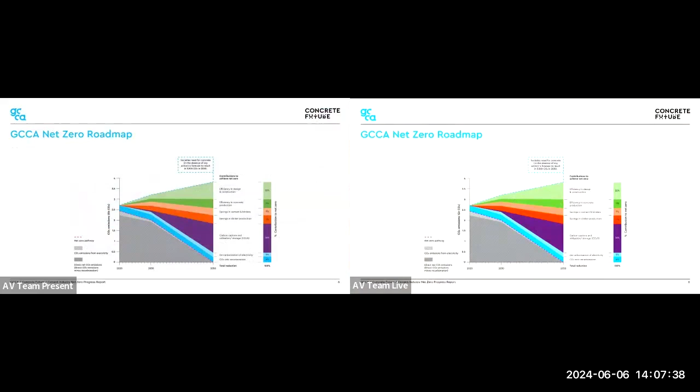So why do we do that? How did this all happen? It's basically this net zero roadmap. We have this collective commitment to go net zero by 2050, and we have identified 7 levers to advance and progress on the net zero journey. Innovation is there to accompany and work on these 7 levers and say, okay, how can innovation help us work, accelerate, progress, develop the discussion, and facilitate development on the journey. That's basically what we are doing here.

Innovation will help us. What we like to say is that our roadmap is feasible with the technologies of today. In principle, we can achieve it today with what we have, but innovation will help us to accelerate, facilitate, and probably make the transition less expensive. That's what we aim to have with innovation.

So how do we work with innovation? We have three platforms. The first platform is this research network, that's the pot where the money is going. It's really research in cooperation with academics. We have partnership with 45 top-class academics around the world, covering Africa, India, all Asia, Americas, etc. We have 80 PhDs working on different topics.

We are making tremendous progress, to be honest. We are very proud of this research network. And we have about 450 scientific community members that are at reach, available for discussion, sparring, etc.

That's important also in the context of the next discussion, which is the Open Challenge. So that's where we are today, this startup accelerator, where we basically believe that startups can help us accelerate. Edelio will come back on that, and he will explain in more detail.

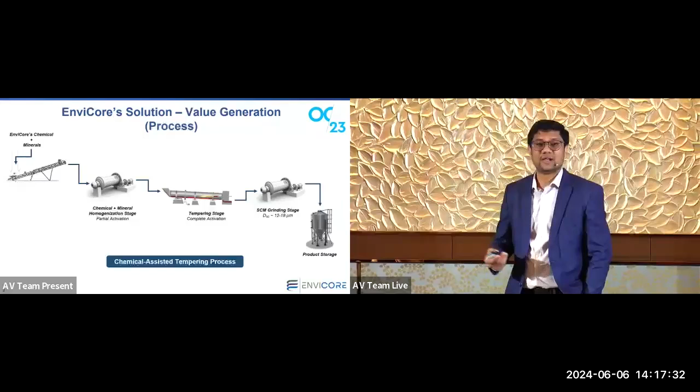Now, how do we do it? We have developed a patent-pending process that takes any type of mineral feedstock, depending on favorable mineralogy, it would be ideal. We've tested recycled concrete fines, aggregates, metal tailings, or mining tailings coming from copper, nickel, cobalt, even gold and aluminum mining operations.

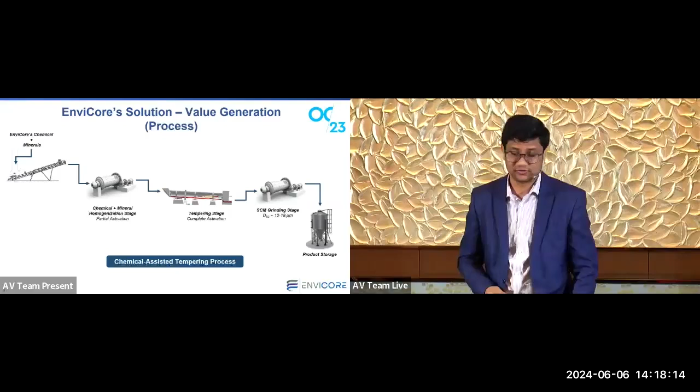And then any other type of metal slags or metallurgical slags, such as steel slag, electric arc furnace, basic oxygen furnace, or even copper slag, coming from completely different operations. And then ash-based materials, ponded ash, bottom ash, and other natural materials such as clays and natural pozzolans. Our process is divided into 3 interesting steps.

Our first step is mixing or homogenizing our proprietary chemicals with the mineral stream in a desired fraction or ratio. We mix it in a ball mill or another type of homogenization process to achieve partial activation of these minerals with the chemicals we add.

That material is then transported to another step, the tempering stage, where we get complete activation of the material, going from inert or low reactive material to a highly reactive material.

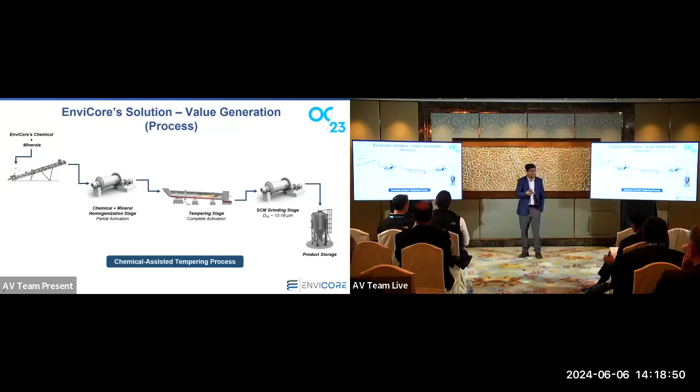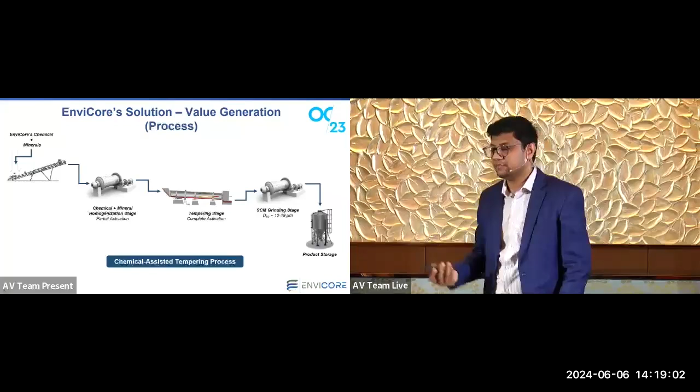Finally, to comply with ASTM, CSA, and other standards from a fineness perspective, we go with the final SCM grinding, which can easily be combined with clinker grinding as a co-grinding process. The overall process is called the Chemical Assisted Tempering Process, or in short, CAT.

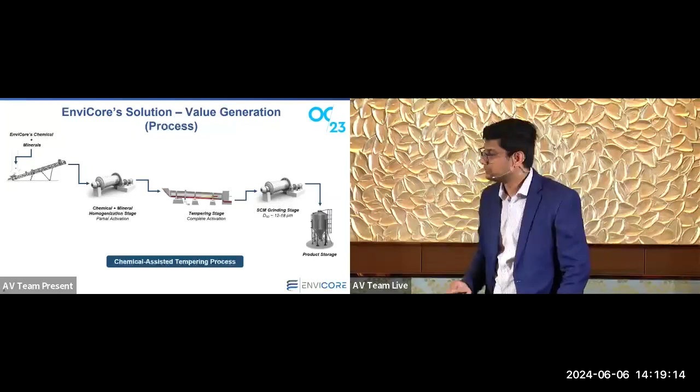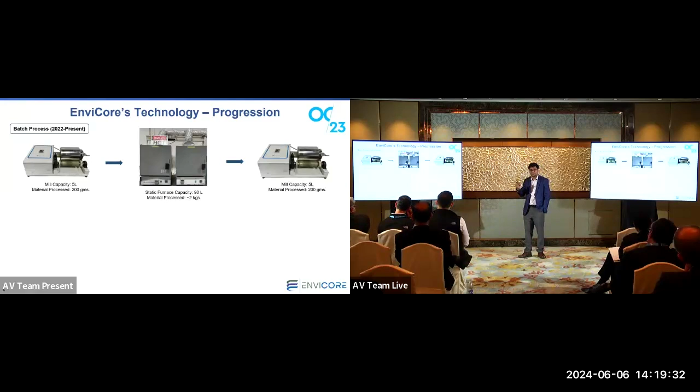We developed this technology back in 2022, where we were just processing small batches of sample in a batch mode, like 200 grams in a roller jar mill of 5-liter capacity. We have static furnaces that can go up to 2 kilograms, but again in a batch phase process. And finally, for the finish mill, we were doing pretty much the same capacity.

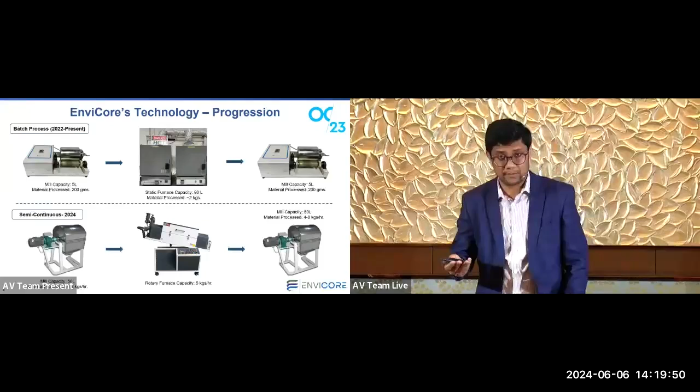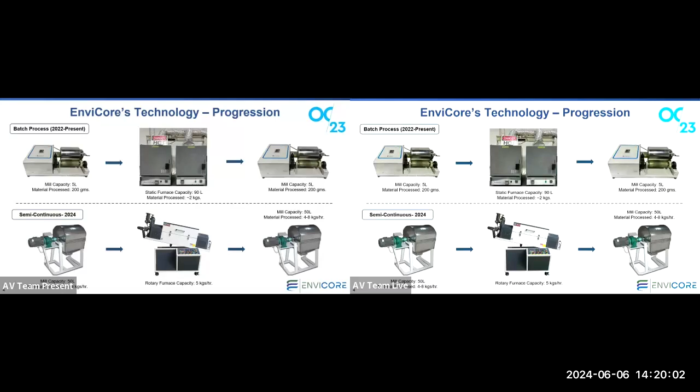But then we decided to scale up the process internally, just in our own warehouse. We were able to develop a semi-continuous operation that can take up to 8 kilograms of material per hour basis. And we have a dynamic furnace that can continuously process the material to achieve the activation, and that can do up to 5 kilograms an hour. And finally, again, the same capacity mill for our finish mill, if we are not doing any co-grinding.

Going into the KPIs and benefits of our technology, till now we have tested close to 38 different streams just to understand the viability and versatility of our technology - what sort of mineral stream doesn't work for our process, what sort of mineral streams are ideal for our process. This exercise has helped us nail down the specific parameters that we need in our material to succeed in producing a high reactive SCM.

Our next scale up that we are working actively on right now is planned to be 600 times bigger than what we are currently doing. And we'll be deploying it with our collaborator in the cement industry.

From a footprint perspective, as we know it's very important, 1 ton of SCM production in the current scenario emits close to 90 kilograms, and we are actively trying to reduce this number as well. Our idea, again, is to maximize the replacement level. So we have done independent and third-party testing on certain material that can go up to 30% cement replacement in a mortar and concrete mix.

The additional benefit we are providing along with increased performance is reduced water demand, which is quite beneficial for concrete and cement producers both. So we are trying to come up with a holistic solution to provide this decarbonization effort while also being good on the durability and performance side as well.

Again, I'm going to emphasize the scalability of our process, because now the plant capacity for the pilot is going to be 600 times bigger. Our commercial scale would be at least 500,000 tons, but it's very specific to geography and also material availability and demand of SCM, whether we are working independently or with a cement company.

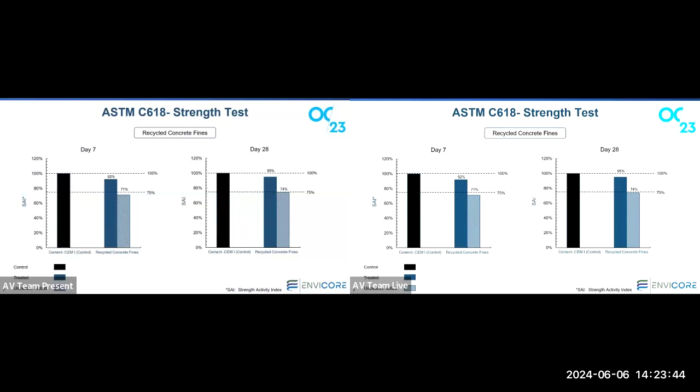The solid blue bar shows the processed material, and the checkered one shows the as-is, but milled to the same extent, because milling does impart amorphization in the material. It's been reported too many times in the literature. But in this case, we have shown that it went from, at day 7, 92% SAI relative to controlled cement, to 95%, showcasing that it's considerably better than the as-is material, even after milling.

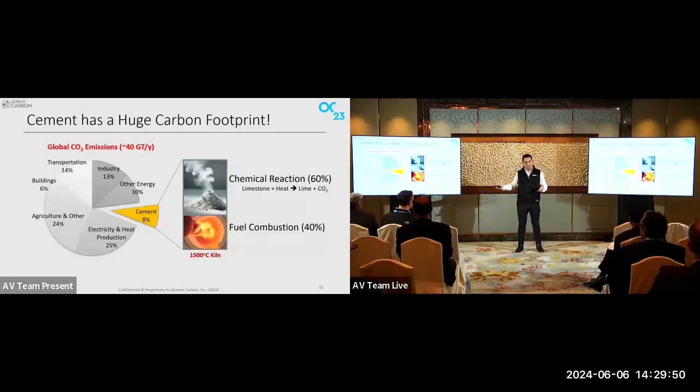Really, the core of our technology is this reactor technology. We can use the same exact raw material feedstocks, limestone, sand, the exact same raw meal that's today used in the cement industry. We put that raw meal into our reactor, and we've discovered a unique way, a proprietary way to use water and a particular steam pressure inside of our reactor to lower the temperature of the chemical transformation. So we're taking limestone and sand, putting it into our reactor, and making various calcium silicates.

The CO2 stream is optional. What do I mean by that? If there is no CO2 off-taker at your site, we can mineralize it back into our product and make a very pozzolanic system. If there is a CO2 off-taker, wonderful, make a belite-rich cement, and we can do that with our process.

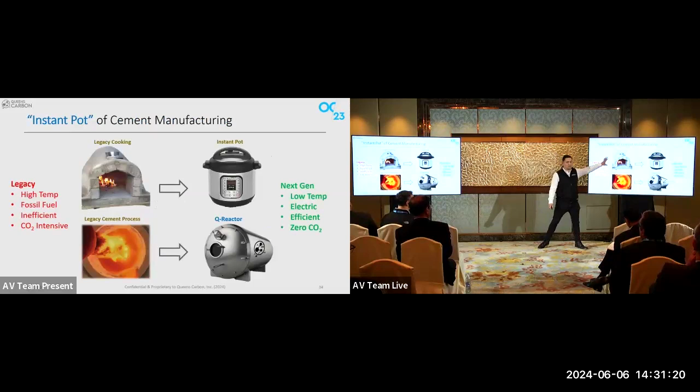You could think of us as the Instant Pot of cement manufacturing. Just like legacy cooking was revolutionized by the Instant Pot, many of you may have it at home, the legacy cement process will be revolutionized by our Q reactor process. Same thing: you're adding your chicken, you're adding a little bit of water, and the cooking process begins.

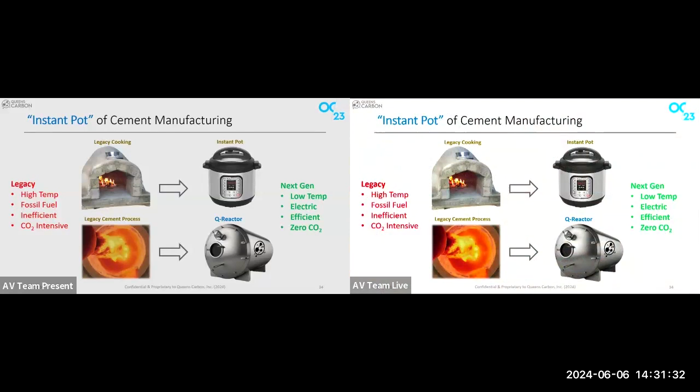I'll get ahead of all the questions right away: this is not going to be a batch process at scale. We're focused on continuous operation, and we're focused on scaling up this technology.

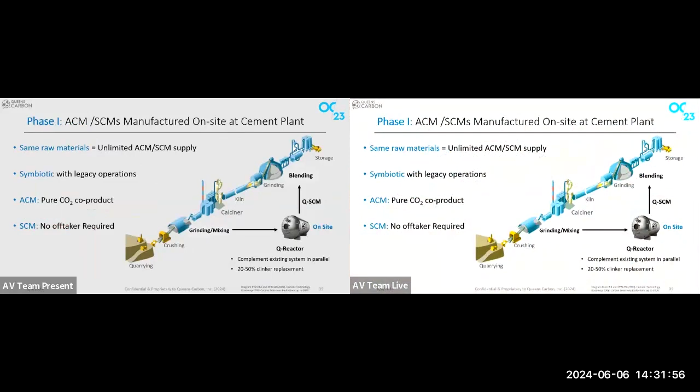Your plant today is located at a quarry. We want to be located at the exact same quarry. We want to take that limestone, take that sand, mix it at the exact same crushing and grinding step, and not disrupt the calciner. The calciner, the kiln process should stay the same because a forklift upgrade to that process today in 2025, 2030, 2035 is a big ask for the industry, and we recognize that.

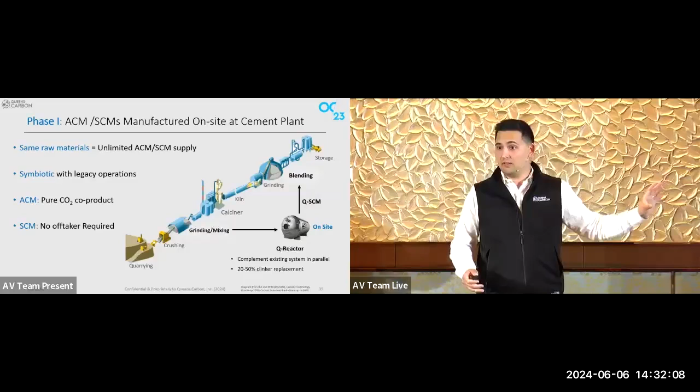What we're saying is give us 20, 30, 40, up to 50% of the material stream. Give it to us in our Q reactor. We will process it. We will either make a carbon neutral SCM or a high purity co-product CO2 and a hydraulic cement material. Take our material, blend it back into your product with zero change for you on your plant. You did not disrupt your kiln, and your customer never saw a difference.

So what did we actually do here? We vertically integrated the SCM supply chain into your cement supply chain.

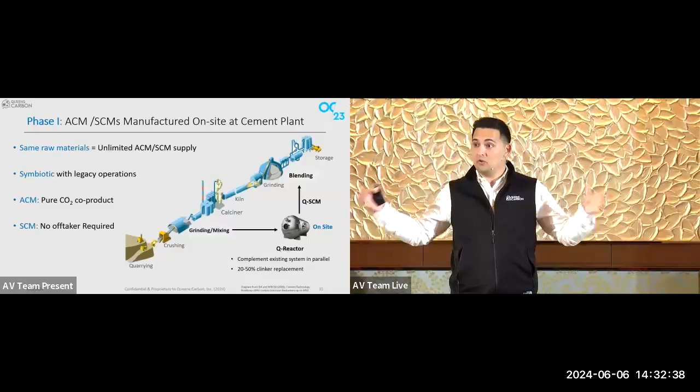No need to rely on logistics, no need to rely on ash, no need to rely on any SCM that you would otherwise depend on. Now you control that world. And where do we come in? We make the technology. We are not cement plant builders, we are not cement plant operators. We make the technology, we give it to you, and you run your plant and enable your decarbonization footprint. The key, and why we're excited to be here with the GCCA, is we want to be symbiotic with all the legacy operations. We want to make decarbonization as simple and cheap as possible.

We started our journey at Rutgers University. Some of you may know Professor Richard Riman, one of the originating Clean Tech 1.0 pioneers. We licensed the technology and won the Breakthrough Energy Fellowship that funded our start. For the past two years we've been developing our prototype, and I'm happy to say we're getting very close to securing funding for our continuous and semi-continuous operation to bring this technology to scale.

We understand how the chemistry works, and we believe we know how to scale this process, but we need your help to support the deployment. So we're always looking for partnerships on this continuous pilot and full-scale demonstration plant, and we need your support to test the product and validate it.

It's not just me—Dave Gershalowitz is in the audience. He's the business co-founder, I'm the technical co-founder. We've also hired an expert material scientist, an expert technical manager, who can lead our R&D operations back in New Jersey while we're on the road.

And of course, you could look at our sponsors, you could look at who we're affiliated with. We're looking to de-risk this technology with venture funding, with industry support, and non-dilutive grants. That Scale Up 2023 finalist status refers to the Department of Energy grant, for those familiar with it. We're very happy to be part of this big consortium—we haven't done the exact math of how much percent of global cement this covers, but we're very satisfied with the members who joined our team.

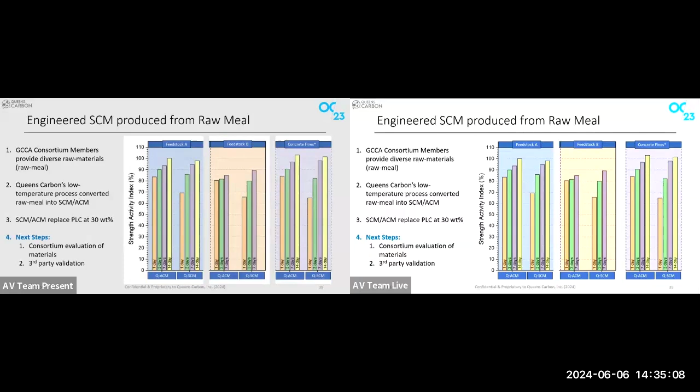This is a 30% PLC replacement. If you add the limestone already in PLC, we're already reaching about 40% clinker replacement. In the lab we've done up to 40% replacement without including the PLC, and we believe we can go much higher.

I mentioned the ACM product is a hydraulic product. Our hope long term is 100% replacement. When the industry is ready to retire the kiln, put our Q reactor in place. Until then, put it in parallel and don't disrupt your process.

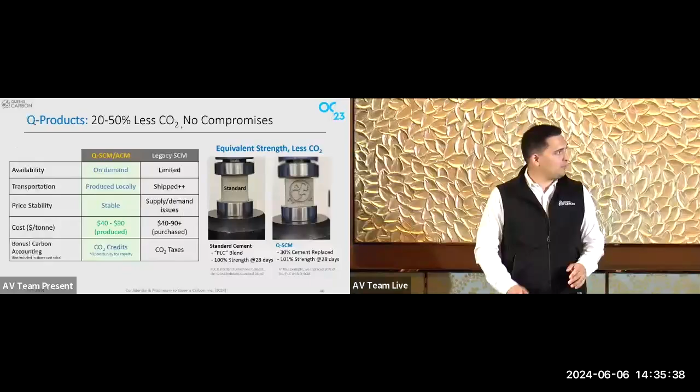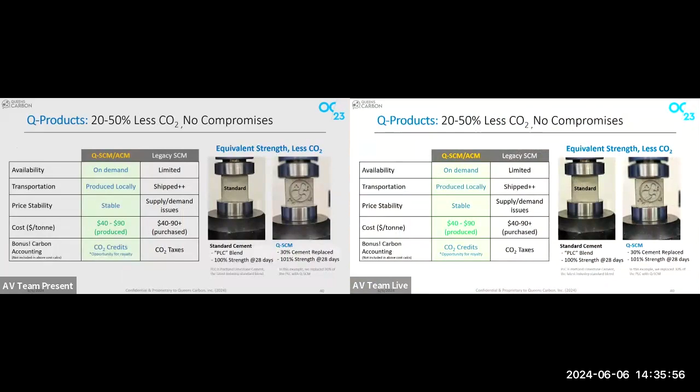So the header of this slide is really what this is about: we want no compromises on the journey to decarbonization. Today, we're excited to say we could do 20 to 50% less clinker, which means 20 to 50% less CO2, and we want no compromise. We don't want to blow up the energy stack, we don't want 6 or 8 gigajoules per ton of energy. We believe our process is 2 to 3 gigajoules per ton, due to that low temperature aspect. And of course, the cost will follow.

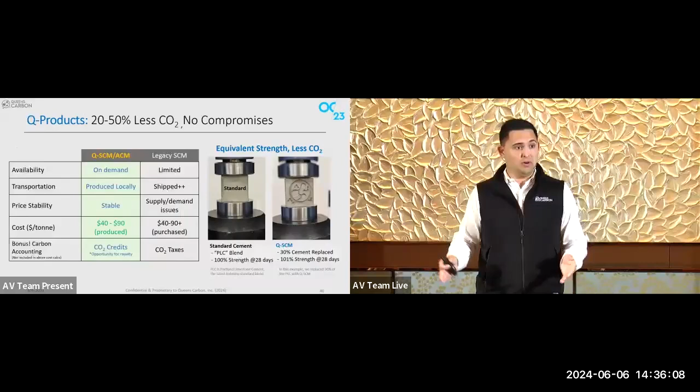There's a lot of ambiguity in how the process will scale, and that's what we're funding now to de-risk. But for the actual energetics of the process, we have good predictability, and we're excited to say that we're cost competitive, probably with cement and most SCMs in the market.

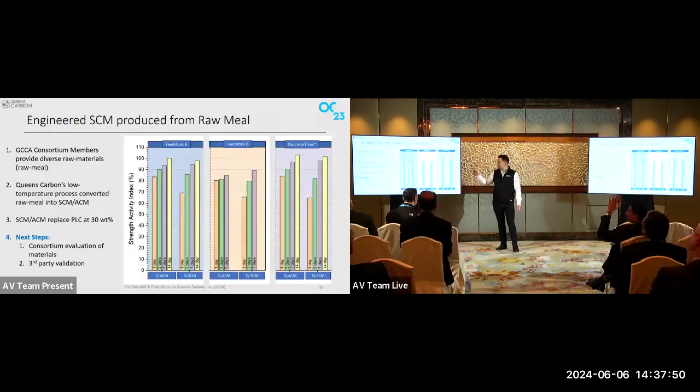That was the previous slide where we really showed the strength activity index, which refers to the PLC control. So we're basically matching. After 28 days, you don't see a difference. Beyond that, it gets even better than PLC standalone. So the idea is, again, the header here says it: you don't want cost compromise, you don't want energy compromise, and you don't want performance compromise.

We have questions in the room. First one, ladies first, sorry, and she was first, and then here and there. Okay, hello. I would like to learn about how you manage the homogenization inside the reactor, the material, because you are mixing limestone and sand? And my second question is about the electrical consumption per cementitious material. Thank you. Sure, thank you.

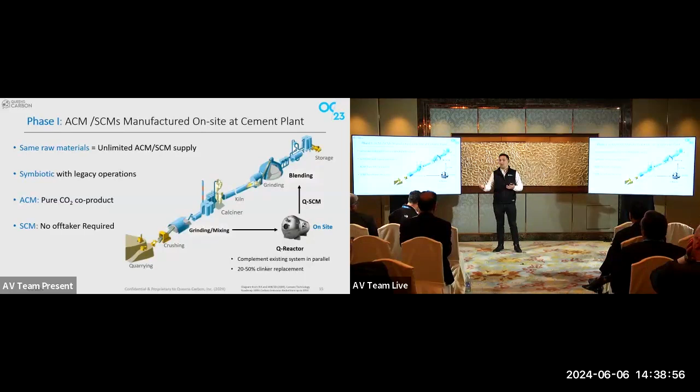First, on the homogenization question, our intent is to use the raw meal. So we don't want to do any pre-processing of the material. Maybe we would change the amount of limestone to drop the calcium to silicon ratio, but that's it. On the feedstock input mode, I think you're asking about what happens inside the reactor, but the homogenization is what comes out of the vertical roller mill, that's what we are putting inside the reactor. Inside the reactor, no homogenization is necessary. You want the atmosphere to turn over, you want the material to be agitated, but that's it. So the physical mixedness of the material you're putting inside the reactor is good enough from the VRM output. You don't need any complex homogenization inside.

On the energy conditions, we really do our calculations in terms of gigajoules. So 2 to 3 gigajoules per ton is the strike zone, which is lower than what the energy is on average to produce clinker.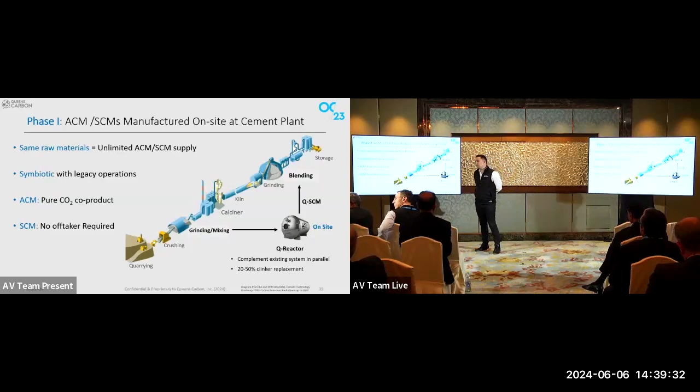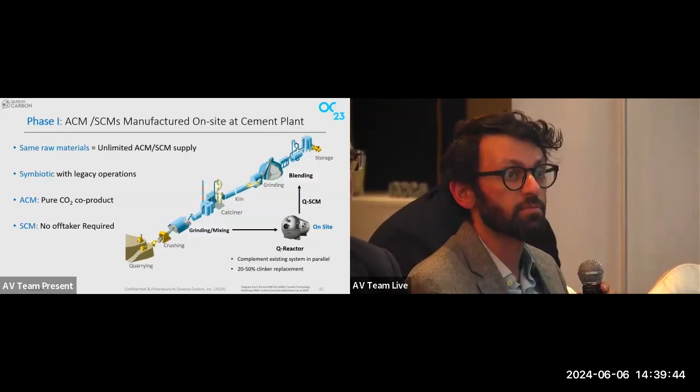Question number 2, I'll sneak in 2 questions. One is, assuming that your statement about carbon neutrality is correct, am I right to assume that the reactor will run on electricity and not on fossil fuels? And then the second question is, does the hydrothermal process result in a damp product that would need further drying?

It's a very good question. And I'll answer the second question first, because maybe that's more relevant. I don't include a drying step because there is no drying step. The products come in dry and they leave dry. We don't believe in any chemical complexity or chemical engineering complexity. We believe adding any step will actually destroy most next-gen emerging technologies, because now the chemical complexity of your plant is just too high for a cement industry. This is not the aluminum industry, right? This is the cement industry. So you really have to think in terms of simplicity.

And the first question, remind again? Right, so it's energy source agnostic. Most of the energy goes into heating the water. So what your boiler looks like can be fired by fossil fuel, electric, geothermal, or waste, and we could do a mixture of those as well. If you look at the carbon footprint analysis at a 30% replacement, it's very, very little dent if you use natural gas. So initially, when your plant is not fitted with the right amount of electricity, you may want to use natural gas as a placeholder. Longer term, decarbonize, right?

So the CO2 reduction comes from mainly the fuel, not the process, right? That's the way you look at it? Yeah, generally that's the correct way to look at it.

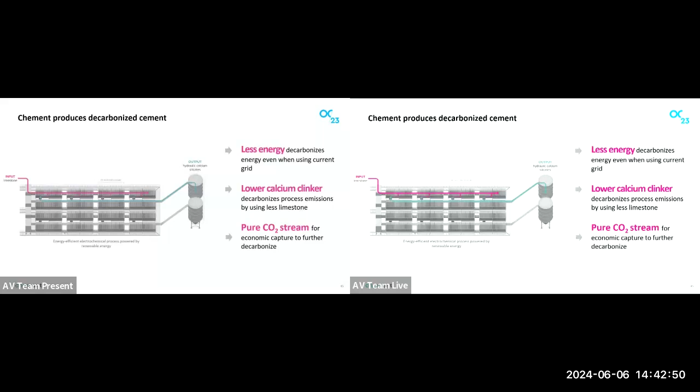We've come up with a process that's more energy efficient. So if you're using grid electricity, you could still decarbonize your energy compared to a kiln today. And of course, if that's green electricity, you can get that down to zero. The output of our process is a lower calcium content calcium silicate. So even if we're using limestone, we're using less limestone, so we can decarbonize the amount of direct emissions that come from decomposing limestone.

And then the last part is if we want to go from a massive reduction of CO2 to zero, the remaining emissions from calcining that limestone are coming off in a pure stream for direct separation.

So what this all means at scale is because it's more energy efficient and because we're starting from a fundamentally economic, scalable technology, we believe that this can be completely cost competitive with conventional cement production.

The typical cost of cement, at least in the United States, is about $130 per ton. So using similar assumptions to recreate that price of 130 with our technology, we think as we scale from where we are today in the lab to our industrial demonstration, we can either be just as cheap or cheaper.

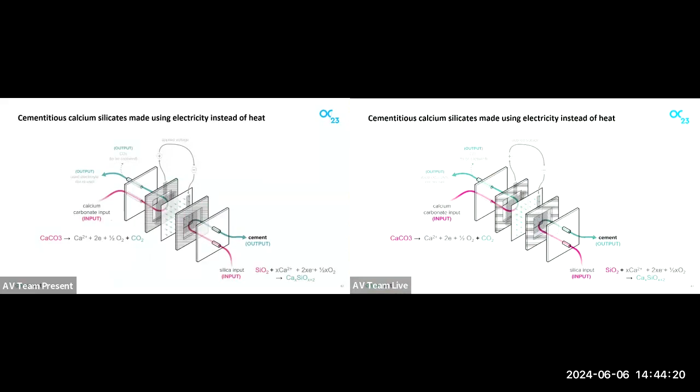So what is happening under the hood at this large scale is we're doing the same cement production chemistry. Instead of using heat, we're using electricity, a voltage. Just like you would charge a battery to move ions from one side of a cell to another, we're doing that with cement. So step one, you have a calcination reaction, which we do with the oxidation part of our cell. And then step two, you have a clinkerization reaction.

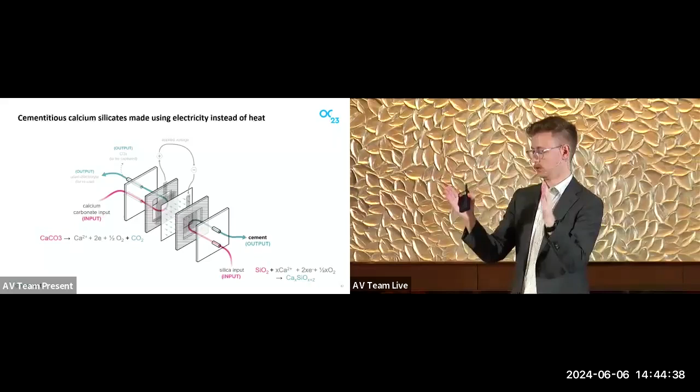So we make the clinker of the future. It is still a hydraulically active calcium silicate. We do it all in one single cell, all with less energy input.

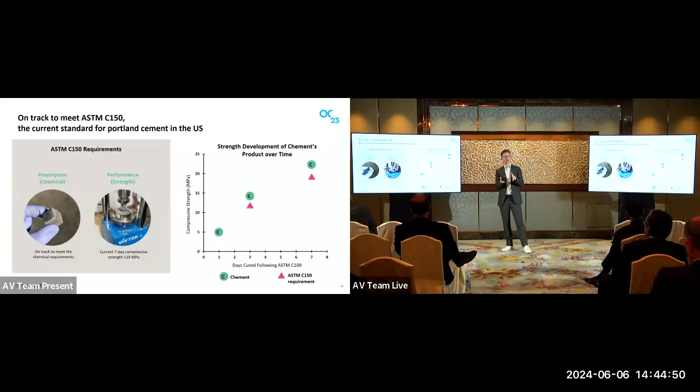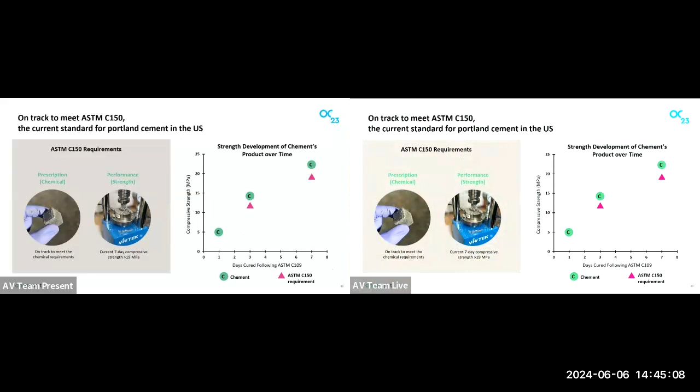The benefits of electrochemistry is that we can actually validate the technology even at a small scale. And from our testing of smaller cubes, we've been able to demonstrate that at least according to the American ASTM standard, our strength development is exceeding the minimum requirements today. We think we can actually keep increasing that to be an even faster developing strength material, while still keeping that calcium content much lower than conventional clinker.

And we're on track to make sure we meet all of the chemical requirements for that cement as well.

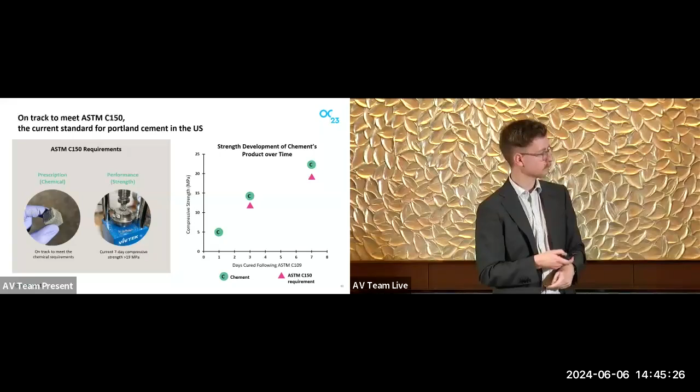We're looking to actually rapidly scale this up. So we started at the milligram scale. The first experiments we did, we made calcium silicates that were so small you can only see them in an SEM. Luckily today we're making much more material at the gram scale. And even at that scale, we're able to move the process to a continuous flow cell before even scaling it up. Once we have completed that process, we will do a demonstration in our lab, about 1 ton per year.

And we're targeting by 2028 to be doing a 10 kiloton per year industrial demonstration of that technology, and of course, beyond that to a full commercial scale.

So we're really excited to be part of the GCCA. We've intentionally engaged the industry despite being very early, because we want to make sure this technology is actually on track to satisfy the demands of the cement industry. It's not our intention to be a cement company. There are a lot of really good cement companies in the world. It's our intention to work with them to create a technology that can decarbonize quickly and at scale.

So the first goal of the consortium was just to send our material to them to validate that it is meeting the requirements, and then get their feedback on what we should do to modify our technology in order to make sure it's scaling in the right track.

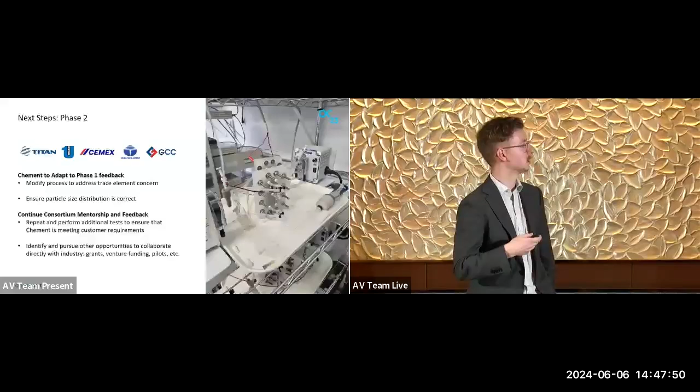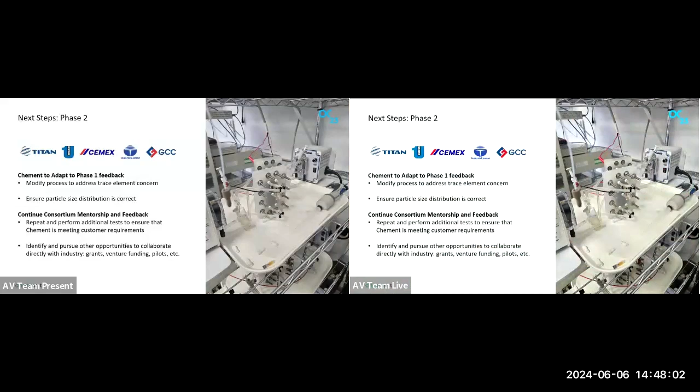And the goal with that mentorship is actually to continue this iteration of the consortium. So as we continue to scale, make modifications of our process to adapt to their input, and continue to develop a complete replacement material.

So I think that was really quick, but I'm sure there's a lot of questions, and I'm super happy to take them.

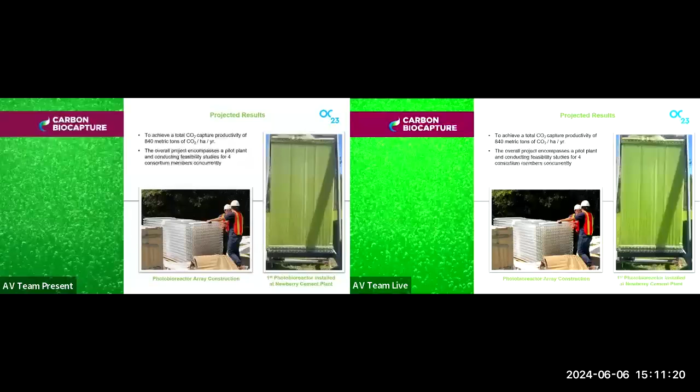So the main objective of the project is to confirm that we can capture 840 metric tons of CO2 per hectare per year.

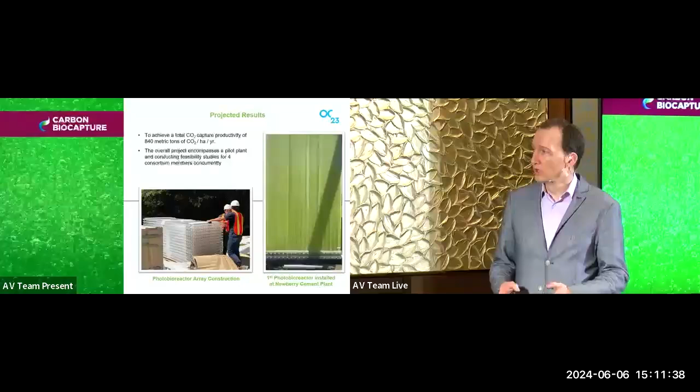This project will encompass, during the project, the company making 4 feasibility studies, one for each member. Each member has sent a sample of algae that were...

...harvested in the plants of the members, and the company is growing those algae in a lab, and then they are going to be put into the photobioreactor. So each company will have an array of photobioreactors to test their own microalgae species.

The project has already completed the tie-in to the main chimney, the main stack. They are in the process of building the photobioreactor farm, and we hope that in the next 2 months the plant will be commissioned and the testing of the CO2 productivity can begin. The idea is that the project will run for a year, because in this type of biological process...

...seasons are very important, so we want to measure the productivity during summer as well as during winter, in order to have a medium productivity over the whole year.

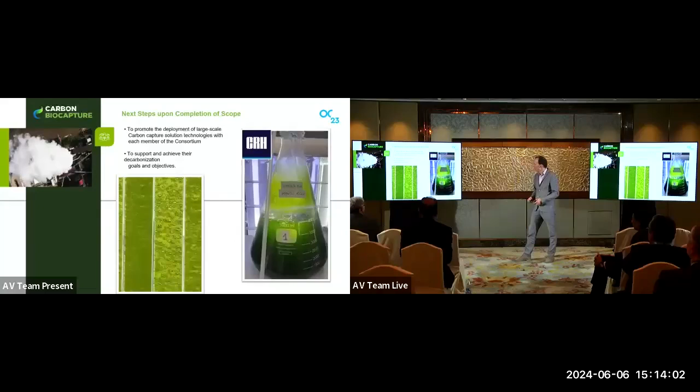In the videos you can see some of the trials they are doing in their labs. Okay, that's it. Thank you very much.

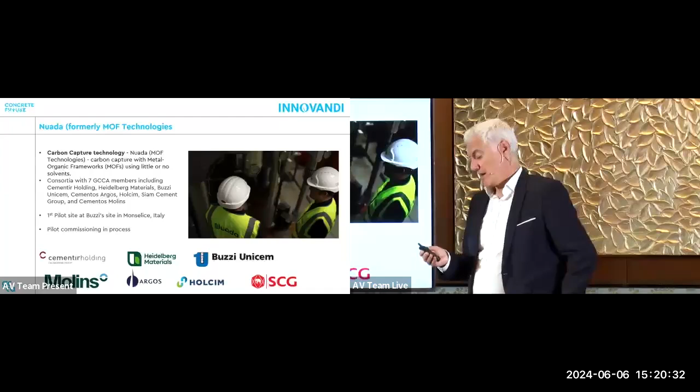So there will be no presentation, as I said. We move now to the next Q&A session. We still have a bit of time, so if you have any question related to the 4 presentations done just before, not on the biocapture, carbon biocapture, but on the 4, we still have time. So if you have any burning question, or a comment to make, we still have a bit of time.

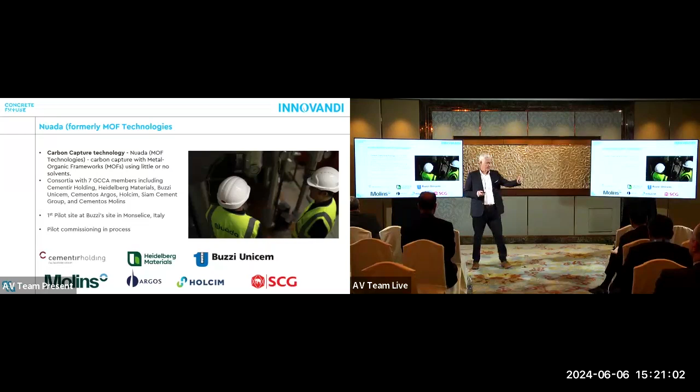I'm trying to understand the process a little bit, and forgive me, I'm a cement person by trade, right? So what's been drilled in my head is the phase diagram and how you make clinker. I'd love to understand what happens and what your microscopy looks like—what does that whole process look like in that reactor?

Yeah, we'll give some clues and insights of what's happening. There's this whole world of hydrothermal chemistry where you use water or solvents to dissolve something and then reprecipitate it, right? And then there's this whole opposite world at high temperature zones where you have a solid state reaction, similar to what happens in a kiln, right? You heat things up, they react, and then you have partial melts and clinker that forms. In our case, we're kind of a hybrid between those two worlds, where you have water-activated chemical reactions, where we're actually never sintering anything.

So we don't have a grinding step at the end because there's no clinker that's actually formed—it's a powder that's formed. Throughout the process, you put in your powdered raw meal, you have a water-enabled chemical reaction that occurs, the CO2 exits the stream. Inside, the materials transform into a calcium silicate, and you separate the water from the CO2, and now you have a pure CO2 co-product.